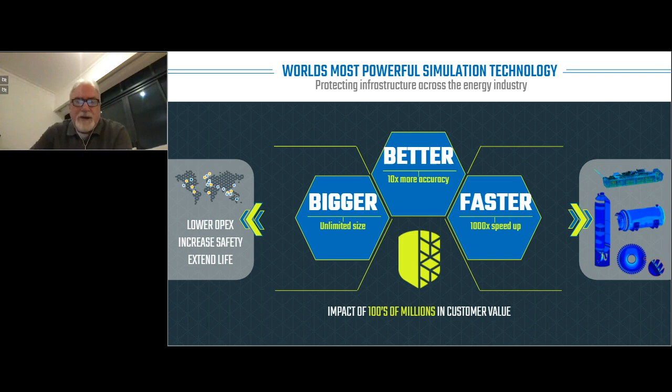But recognize this isn't easy. This was technology that took well over 10 years to develop, write new algorithms, and then turn this into a software package. So a company that had over 120 man-years of effort before it ever came to market. And it is genuinely a game changer in the marketplace.

So today, yes, you'll hear from my VP of Sales for Southern Europe, who is the account director for LNG, Adriatic LNG, with Cosmi and Bureau Veritas. And myself, I'll do the opening and take you through the agenda. And my colleagues from both Progepi and from Bureau Veritas.

I'd like to just take you through why this is important. Nobody has missed out on the geopolitical events of the last 6 months, the last year, in fact. And in that, we now have market trends appearing in LNG that are both challenging, but also highly interesting.

I've done my brief intro, but Ricardo will give us a bit more detail about Akselos. And then we'll look in detail at Adriatic LNG and the project background, look at some of the key results, and then open the floor for some questions from the audience.

So the market dynamics that are driving change, it comes from geopolitical transitions in Eastern Europe. It comes from the drive to be greener in everything we do and reduce our dependence on carbon fuels that are pollutants. And this has driven a demand for LNG, where imports this year across Europe are 66% greater than last year, many of which are from new sources, and really is at this moment stretching the capacity within European LNG plants. What that's driving is asset integrity being critical to production more than it's ever been.

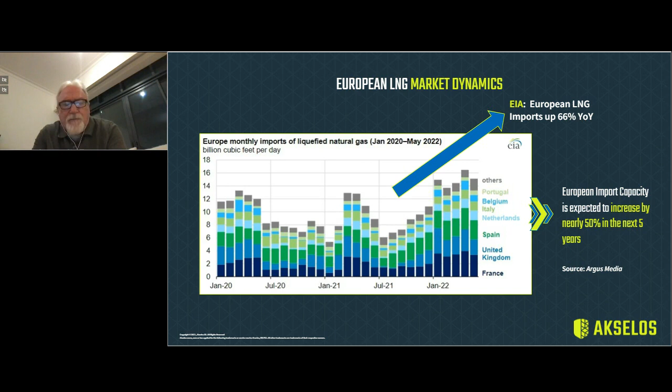And we need this because at the moment, that capacity limitation is one of the contributors to driving higher prices. And every single household across Europe is feeling this in their pocket. And so the work we're doing is to maximize the production with existing plant, and then being very targeted at what new plant we need to meet demand.

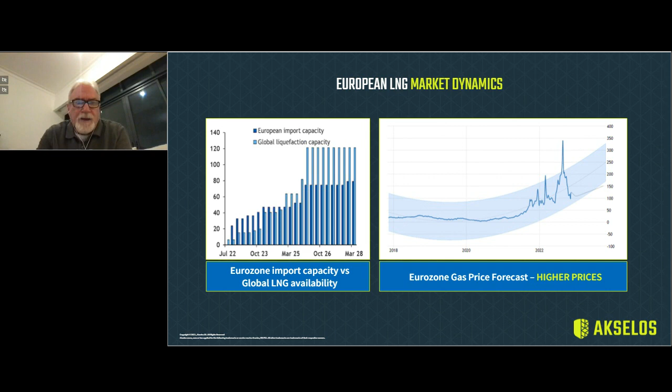So in the short term, plants are running near to their nameplate. What we mean by that is they are at capacity or near capacity. And so any shortfall in integrity, reducing that production capability, has very, very significant outcomes. And we're trying to help many companies avoid that downtime or that lack of performance.

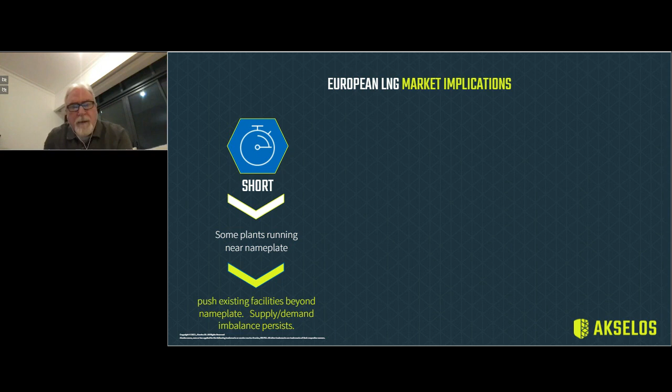In the medium term, additional capacity is required. So just about any LNG plant is, one, maximizing, sweating the assets they already have, but already planning to increase capacity, buying new equipment, trying to deploy it as quickly as possible. And in doing so, also bringing in that digital thread that allows them to monitor 24/7 the structural performance.

As we mentioned earlier, the structural performance is usually an event that we use our rear view mirror for. We kind of look at things that have gone wrong and try and work out to prevent them happening again in the future. What Akselos is bringing with its speed and capacity is the ability to real-time monitor critical structural equipment. And we'll talk about that more through the presentation.

In the longer term, balanced new regasification liquefaction infrastructure, as more supply comes online, and we try to manage those regional imbalances. And when a major supplier stops supplying, you have to move very quickly with new sources. And those new sources are available, but we have to have the facilities to import this gas, process it, and then get it to market. And this is really the challenge that we're helping companies confront.

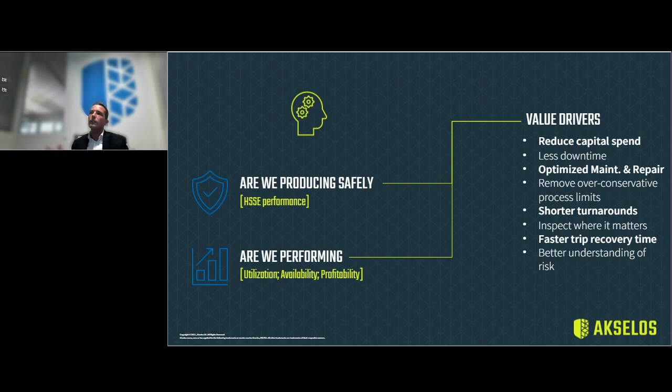So that is where we play. Structural digital twin is what we are providing to our customers. Our technology allows you to move from typically a run-to-failure maintenance approach that you have in some of your assets, to a predictive maintenance based philosophy. So we are talking here about the 24/7 surveillance of your critical assets across your entire fleet.

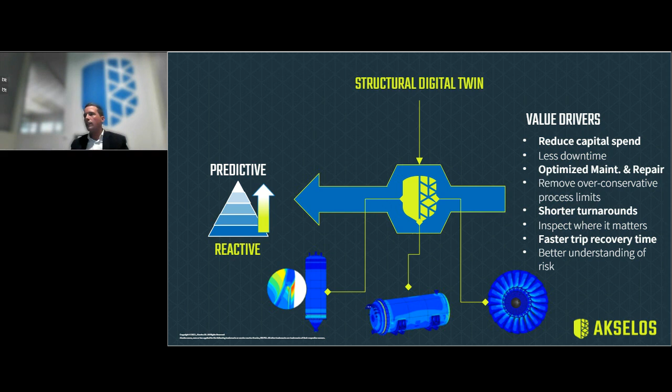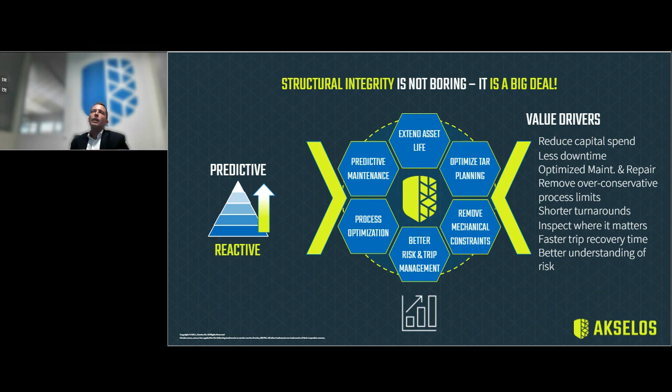So structural integrity, yeah, it's really important to have the asset management control of your assets. What I meant to say with this, it's like you could really definitely improve your P&L if you could reduce dramatically the hotspots, so improve your inspection plan, as we are going to show on the next slides, unlock the fitness-for-service, the FFS constraints, and as well having a continuous fitness-for-service assessment available to your assets.

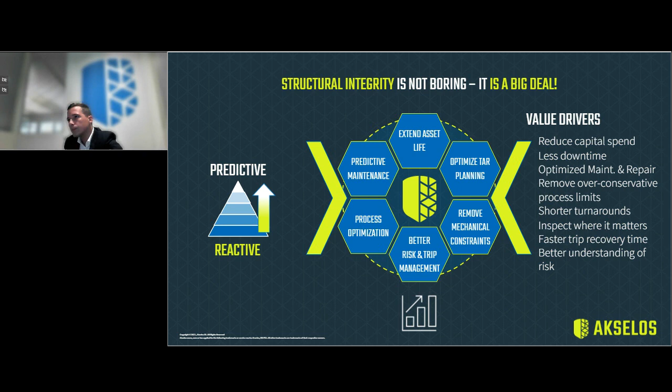So our structural digital twin, we provide a fully parametric physics-based model. And most important, we are bringing this from the design phase to operations. So having this in almost real time, and when I say real time, per cycle of our assets. And that is really powerful.

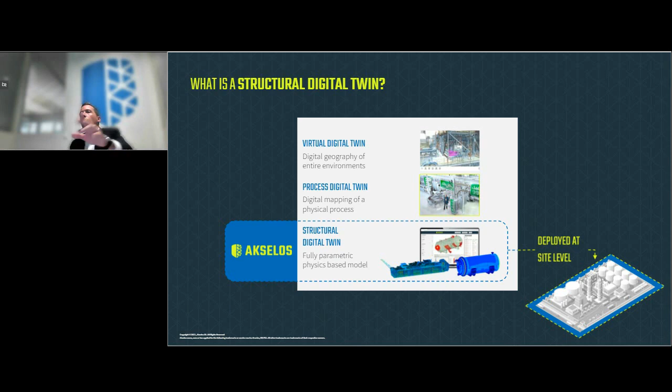So we deliver our solutions and our models for the entire fleet, and we focus on the most critical assets. We have already deployed in assets such as cokers, pumps, pressure vessels, SMR, reactors, turbines. We recently deployed a site-wide project at Shell Qatar.

And today we are going to focus on the most critical asset on the LNG platform, that could be ORV. So let me introduce our colleague and partner from Cosmi, Mr. Graziano. Graziano, moving to you. Yeah, thank you, John. Thank you, Ricardo.

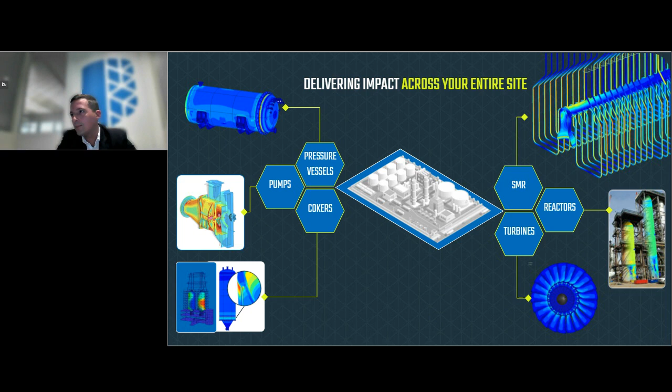Let me introduce my company in a few words. Established in 1974 as a construction company, Cosmi specialized throughout the years in various energy sectors, focusing in particular on oil and gas. Today, it is an integral part of a group of operating companies providing the management and execution of national and international projects in various fields: brownfield, supply chain, logistics, and construction.

Cosmi's activities include all stages of industrial construction for the offshore and onshore sector, as well as for oil and gas and chemical companies and the whole industrial field in general.

ProJP is an integral part of Gruppo Cosmi. It started its business in 1999 as a supplier of engineering services for the chemical, petrochemical, and environmental sector, and its solid experience allowed the company and the group as well to range from the design of oil and gas plants to offshore and maintenance engineering, providing a complete and professional service both in Italy and abroad.

ProJP is a supplier of cutting-edge tailored solutions in project management, consulting, and industrial engineering services, mainly for the oil and gas, petrochemical, power, and offshore design sectors.

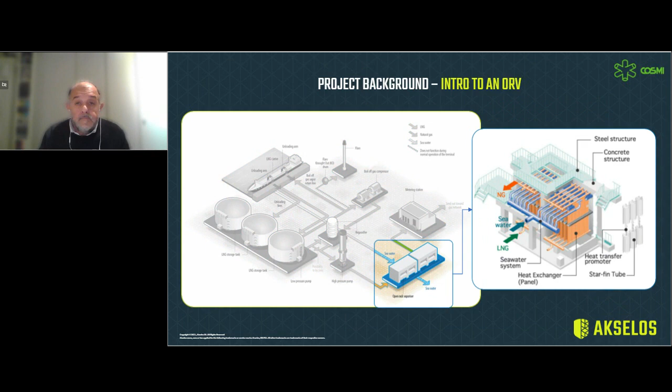One of the most critical equipment is the open rack vaporizer, the equipment where LNG vaporization takes place. Four LNG vaporizers, using heat naturally contained in seawater, are installed at the LNG terminal.

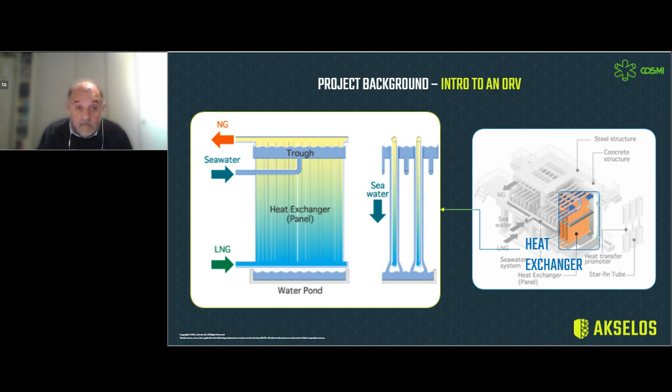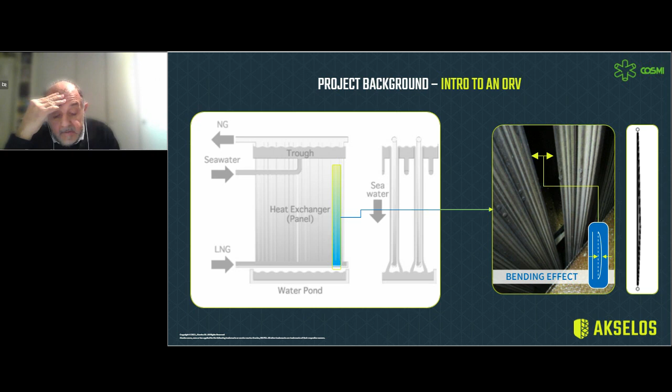The open rack vaporizer utilizes seawater to vaporize the LNG. The ORV are made up of multiple sections of vertical panels of aluminum finned tubes, which are manifolded to the LNG header at the bottom and to gas headers at the top of the ORV.

The LNG flows through the tubes from the bottom up, while seawater flows down over the outside finned surface of the tubes, collecting in the basin at the base of the panel, and from there, the seawater flows by gravity to the sea.

Routine inspections of the ORV units showed that deformation of some pipes on the outer fringes of Unit 3 occurred, and we wanted to investigate the impact of the observed bending on the stress level of the tubes.

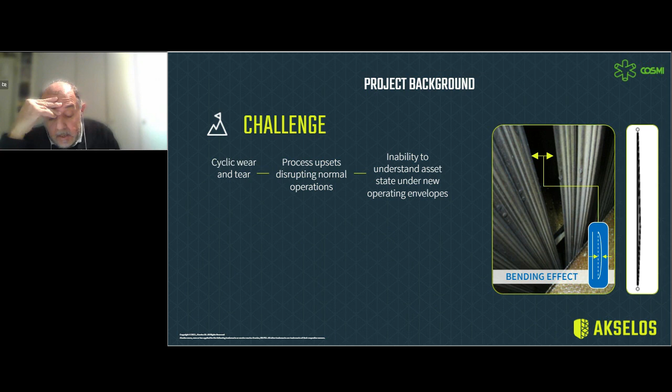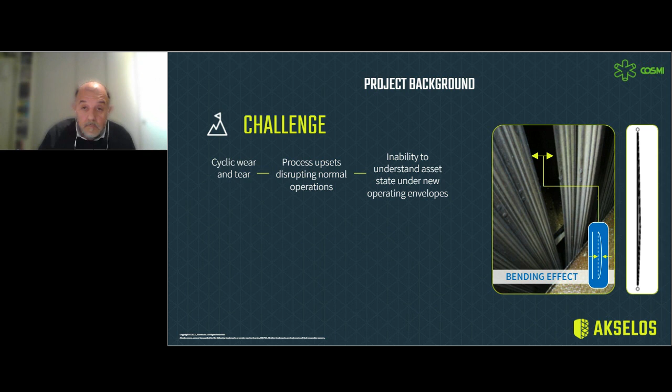Thus, our challenge was to understand the mechanism of cyclic wear and tear and how it interacts with asset operation. For this reason, we investigated the potential creation of cracks.

Issues become problems that lead to unplanned shutdowns, increased fatigue accumulation, which can cause shortening of asset life, and finally, residual plastic deformation.

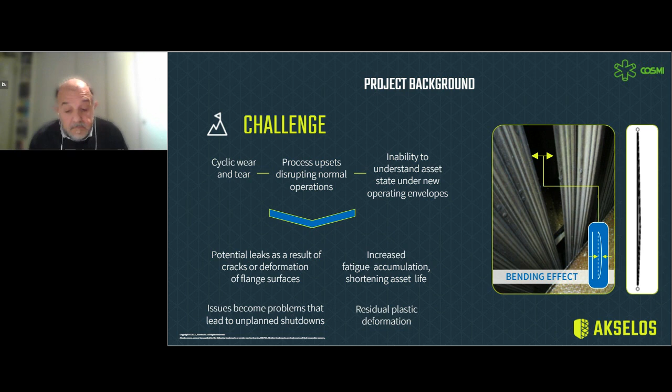Graziano, before we move on, could you let the audience know what was it about this asset where you believed Akselos to be your first choice technology to help you solve the issues the ORV faced?

Well, John, thank you for your question. We had areas of deformation, and we needed to know how the entire ORV would react to any significant areas of stress. Local models would have taken too long to build and would not have provided the holistic view we were looking for.

Okay, could you please describe the two phases of implementation? Yes, of course. In the next few minutes, I'm going to show you the first phase implementation plan, already completed, and the second phase, still ongoing.

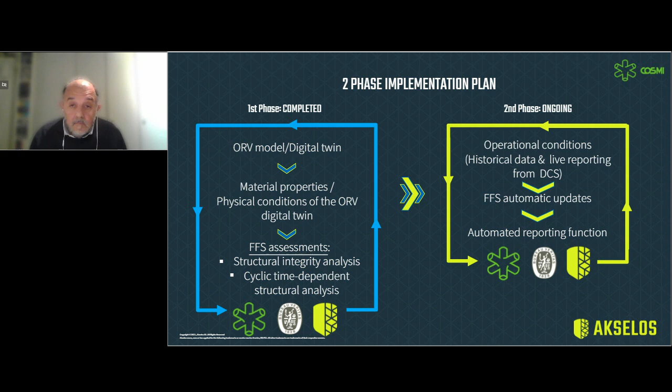Okay, could you give a brief description of how you went about building the model?

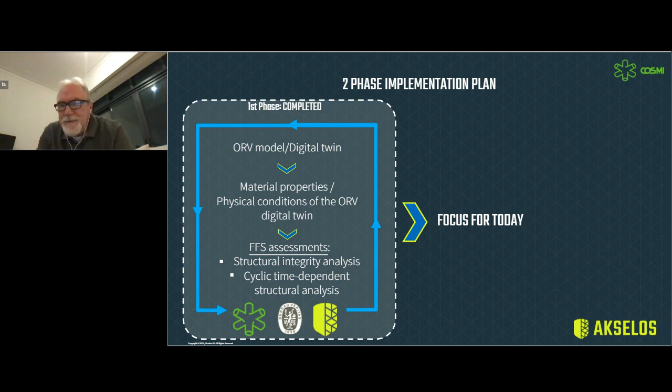Yeah, basically we went through three main steps. First, starting from the CAD model, we set the boundary conditions. Second, we did a mesh convergence study. Third, we applied the temperature distribution in the tubes. At the end, we also performed the model evaluation based on ASME standards, validated by Bureau Veritas.

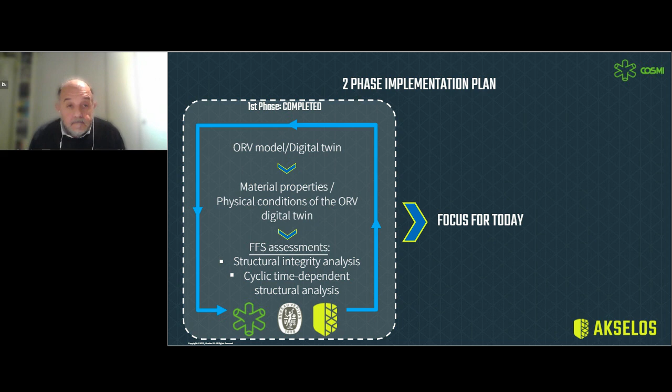Okay, so this is a lot of tubes on 5 racks there. You're not concerned that in a single model this might just be too large to even compute?

Yeah, normally we would be, but we built large models in Akselos before, so we were confident the software could manage the challenge. We wanted to see not only the impact on the tubes with known bending moments, but also the impact this may be having on other tubes in the array.

So what data did you capture? We captured all boundary condition and current condition data from historical inspections. This may seem straightforward, but these are huge units, and capturing everything in one single model had until now been considered impossible.

So I guess the $50 million question is, how large was this model? It was very large. The model exceeded over 500 million degrees of freedom, but it was essential that we did this in a single model to accurately observe the impact across all arrays.

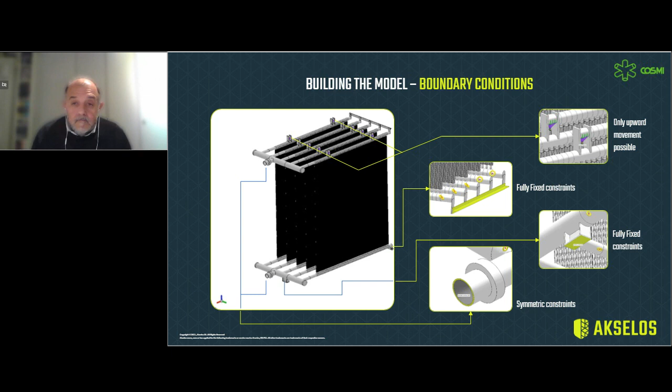Okay, and I believe you did a mesh convergence study. Why was that necessary? Yeah, it was essential that we did a mesh convergence study to ensure model accuracy and get the right fidelity in the model for the type of analysis we were about to run.

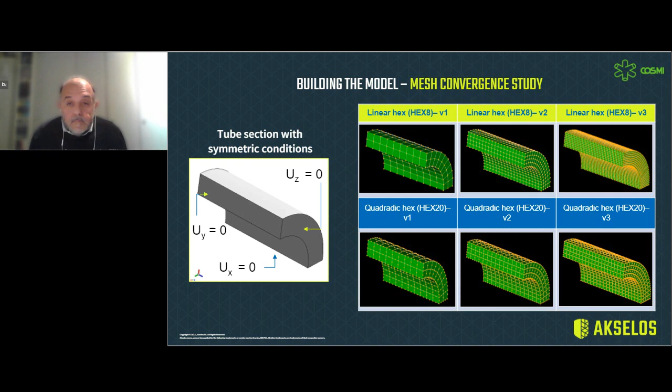For building the model, we used the element type HEX20 quadratic order, with 1.5 million degrees of freedom per tube, because quadratic elements gave the best convergence, but this meant the model was going to be huge. We were very surprised that Akselos software could cope with such a huge FEA model.

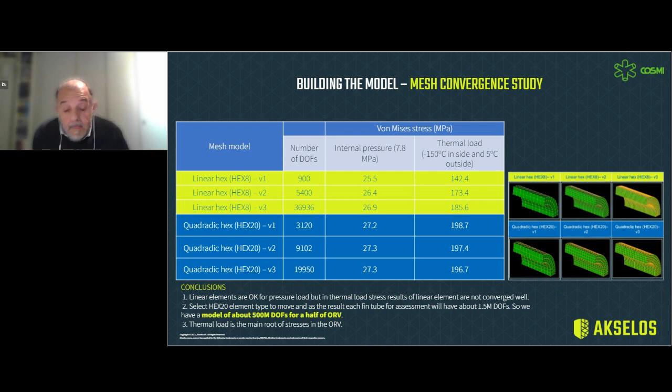We applied the temperature distribution and the operating pressure within the model and ran an intensive fitness for service assessment. We established that the curvature of the tube was almost entirely due to temperature ranges the tube was subject to during startup and shutdown cycles. We also established a stress ranking for every tube in order to focus future inspection efforts on those tubes most prone to potential cracking, effectively creating a stress hotspot map across the entire array.

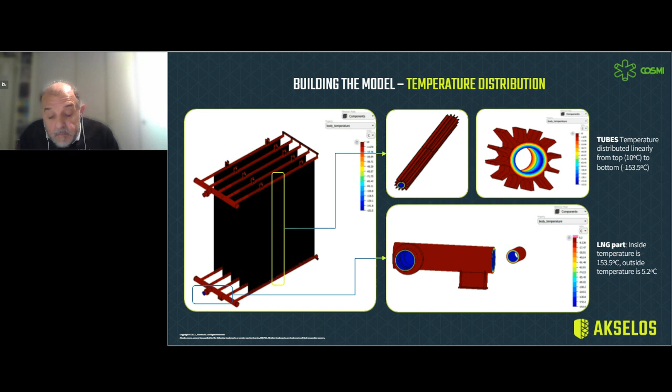So what analyses were you performing? We performed a fitness for service level 3 assessment to API 579.

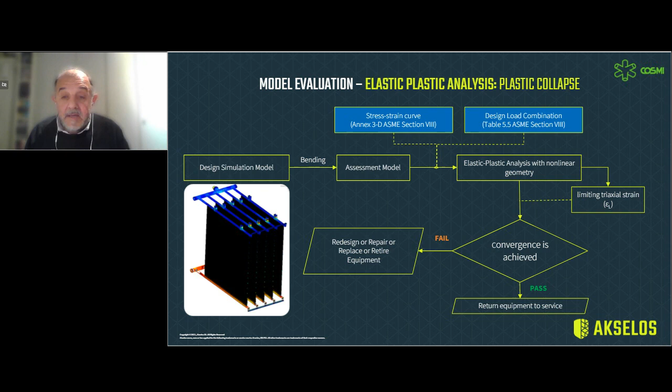Now moving on to the final results, what exactly were you focused on? We focused on the entire unit, 68 tubes in 5 arrays.

So we can say that we passed the assessment, but discovered a wide variance in the stresses at the tops and the bottoms of tubes, and that some tubes were under greater stress than others. The model has now enabled us to rank the tubes based on fatigue life status and update our RBI accordingly.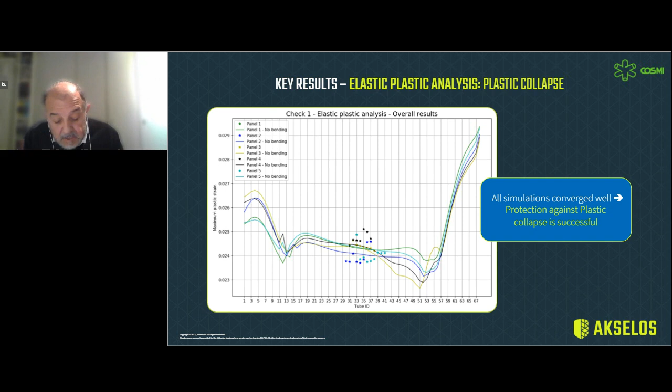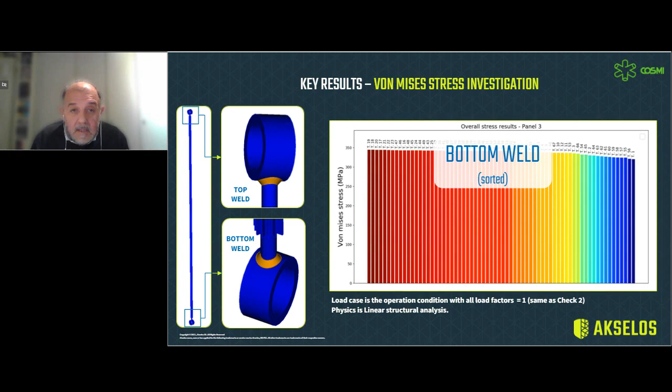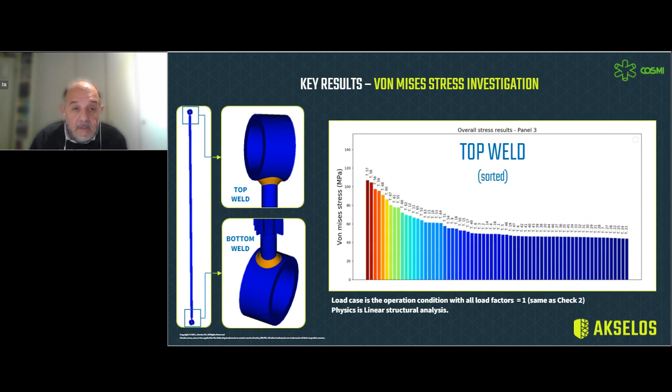So what's next, Graziano? Next, we'll be deploying on all 4 of our units and use Akselos for near real-time monitoring of the entire structural integrity, a full-time and near real-time fitness for service on demand, with the help of our friends at Bureau Veritas Nexta.

Well, thanks, Graziano. Fascinating. I think at 500 million degrees of freedom, you've beaten our previous record. And I'm glad to have been part of this project to see that.

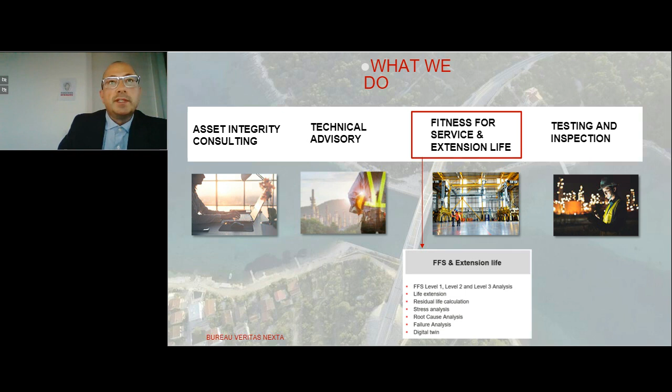The main services for fitness for service and extension life include stress analysis or strain analysis, residual life calculation, root cause analysis, failure analysis, and all levels of fitness for service assessment according to the standard.

So what is fitness for service analysis? According to API 579, fitness for service assessments are quantitative engineering evaluations performed to demonstrate the structural integrity of an in-service component that may contain a flaw or a specific damage.

In particular, level 3 assessment procedures are intended to provide the most detailed evaluation. In a level 3 assessment, the most detailed inspection and component information is typically required, and the recommended analysis is based on a numerical technique such as the finite element method.

The main objective of a fitness for service assessment is to demonstrate, through detailed studies, the further reliability of equipment even beyond its design life, and also when design conditions are changed, or in the presence of a defect or a specific damage mechanism, for instance plastic deformation.

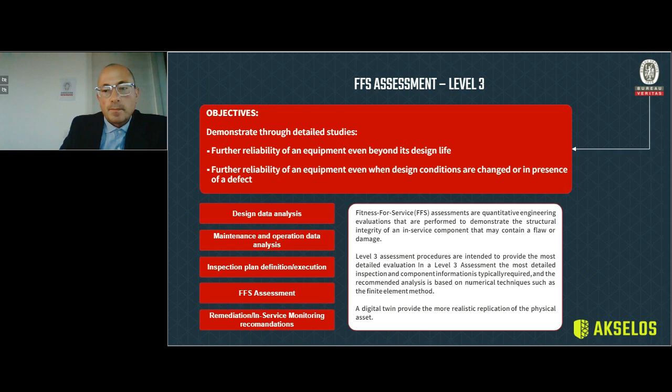So, which type of fitness for service assessment have we performed for the open rack vaporizer?

As shown before, the main fitness for service assessments performed are two types. The first is a structural integrity analysis performed according to ASME code, and the second is a fitness for service assessment considering a cyclic time-dependent structural analysis.

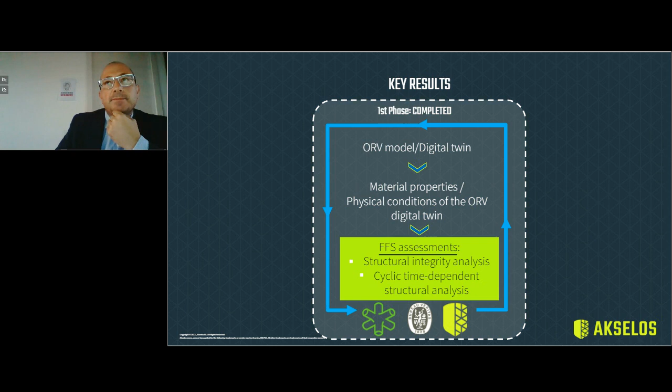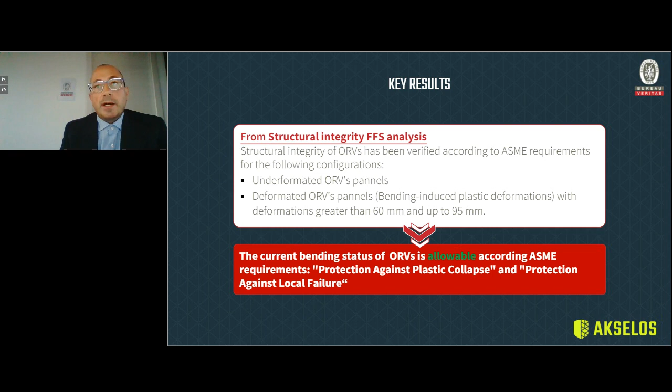From the structural integrity fitness for service analysis, the main outcome is that the current bending status of the ORV is allowable according to ASME requirements. According to this analysis, the ORV can be put in service even in the presence of very large deformation of the inner pipe, up to 95 millimeters.

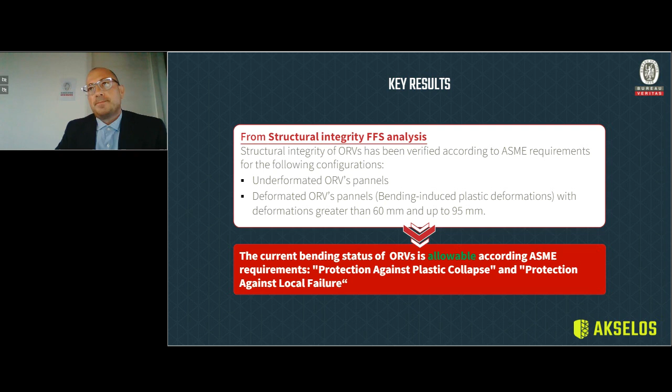The second type of fitness for service assessment is time dependent. The main objective of this analysis is to evaluate the residual life of the ORV considering a cyclic time-dependent structural analysis. It was performed to estimate the number of cycles to fatigue crack nucleation due to cyclic bending deformation generated by startup and shutdown cycles.

Starting from a digital twin model, the fitness for service assessment was able to predict the nucleation of a technical crack detectable by conventional non-destructive technique. As told before, the Akselos digital twin of the ORV gives a detailed map of the elastic-plastic behavior of the whole ORV. A very complex model has been developed considering static supports, the two manifolds, the 5 panels of finned pipes, and 68 finned pipes per panel.

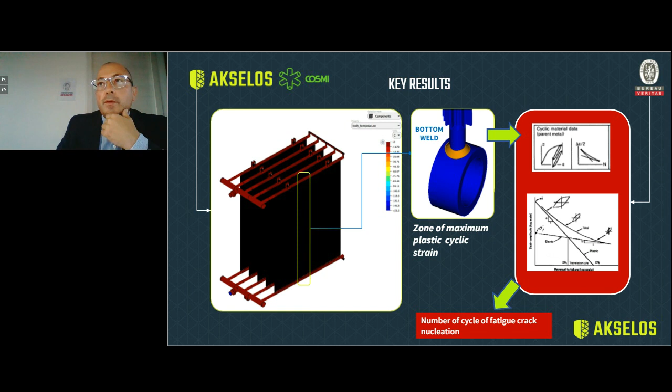From the cycle time-dependent structural analysis, the main results are as follows. This analysis was performed to estimate the number of cycles to fatigue crack nucleation due to plastic cyclic loading. The number of cycles to nucleate a fatigue crack at the most cyclically strained zone has been evaluated. Considering the actual warm-up, cool-down cycle of the ORV, the fitness for service assessment for cyclic loading revealed that fatigue crack nucleation may occur during the service life of the equipment.

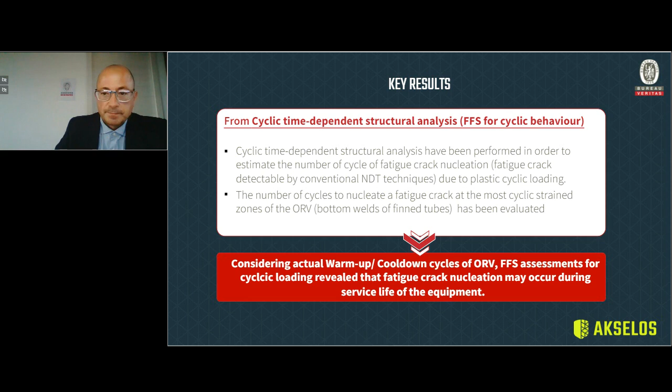Okay, thank you Graziano, thank you Gianmarco, for all the really good and amazing job you've done here for our customer, Adriatic LNG.

So I will move on with a quick summary of this presentation before we start with the Q&A. There are 4 main takeaways that I would like to discuss with you.

Using a structural digital twin, as you could see, could drastically reduce the number of hotspots, giving the customer more time to focus on where the real issues are. Having such a high-confidence model could definitely extend the life of this asset.

As a third point, we are the only provider that can give a continuous fitness for service assessment in almost real time, meaning per cycle. Most of you already know the costs and logistics required to do such analysis, so a more effective maintenance and inspection plan dramatically reduces OPEX costs.

And the last point is a single source connected with operational conditions. We can have historical data storage such as OSI soft PI, as well as reporting from DCS. So all of these 4 main takeaways are applicable to all critical LNG processing equipment.